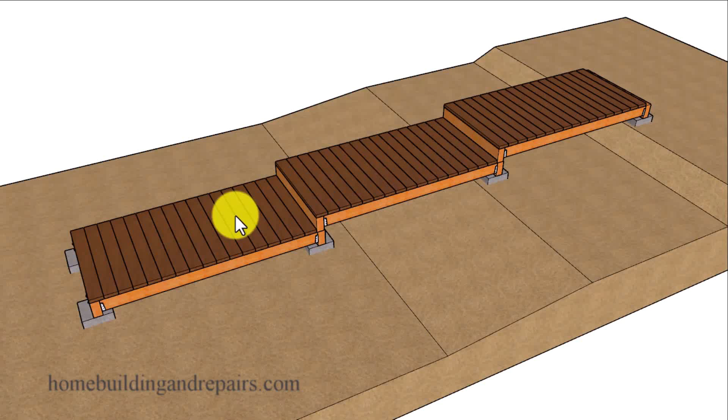Here is a video that will be helpful for anyone who is going to build a long stairway, something that might have 5-foot or even 8-foot long steps to go up a low sloping hill. And that will be to simply build the stairway in sections like you would a floor. So there's no need to cut any stair stringers here. And this video is meant to just provide you with the basics.

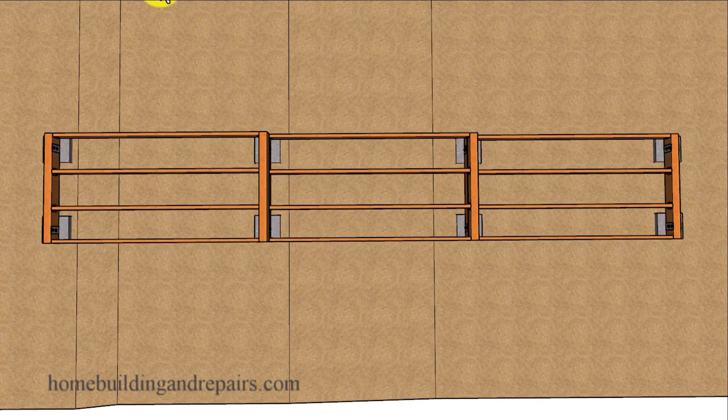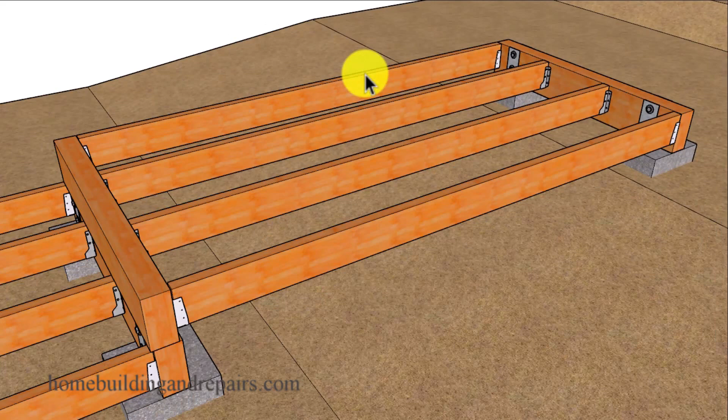So again, we're just simply building floors, and we're setting the supporting beams on top of other beams or concrete footings to transfer the loads down to the soil. So again, concrete footings with some metal hardware so that we can secure it firmly to the footing. And trust me, I've seen plenty of these built where they're basically sitting on top of the soil, some concrete blocks, or even a small footing, and that might not cut it.

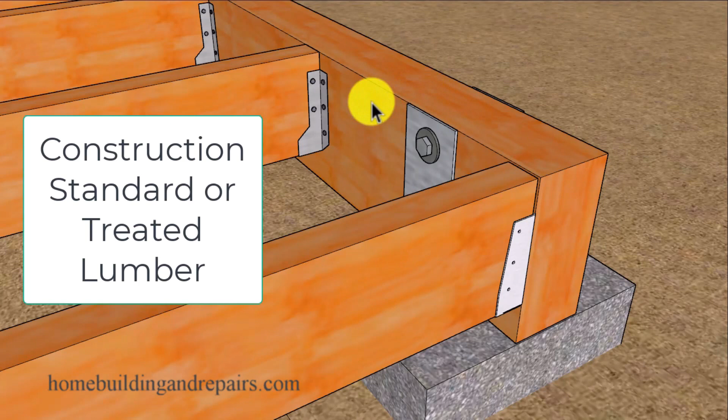So here you can see where we have some 2x6 joists, 4x8 beams, and we have some 2x6 hangers here, regular hangers, and then we have some inverted or concealed hangers. And you can always move this joist over if you want to use these hangers, and then let the decking cantilever 1.5 or 2 inches, and that shouldn't be a problem, but that would depend upon the design.

And of course we have a 16-inch on center layout. Our stairs are 48 inches wide, and each step is about 8 foot in length. And you might be able to get away without using a beam here if you were going to have the joist sit on top of maybe a 2-inch framing base plate, something to support the joist.

And then of course you could use a 2x8 here, and you could simply nail these beams together. You could nail the framing components from the upper floor into the lower floor, or you could even use some type of hardware, screws, something like that.

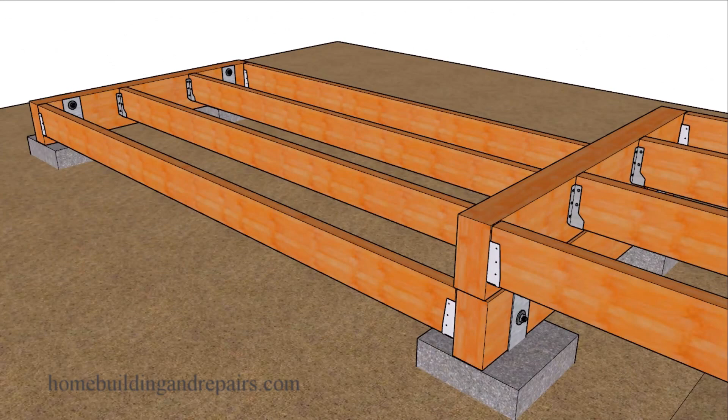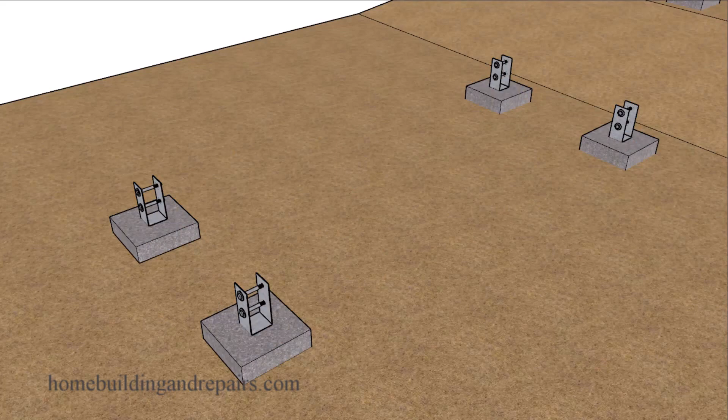So not too difficult here, or at least I would hope it's not too difficult to take a look at something like this and kind of figure out how you could put it together in the same way that you would frame a deck. And a project like this could also be considered 3 separate decks that would simply be changing elevation. And of course you are going to need some form boards and some holes for your footings.

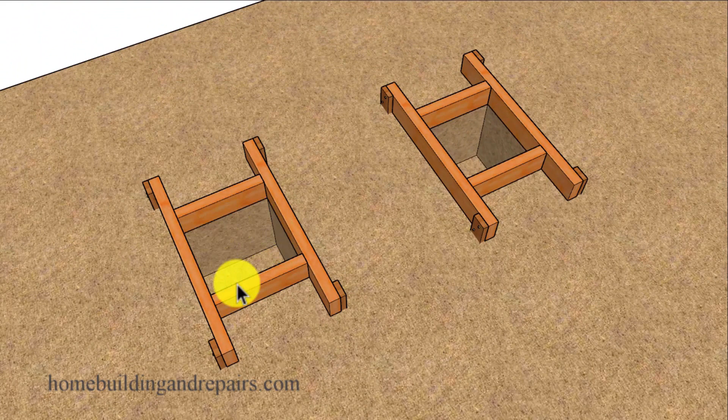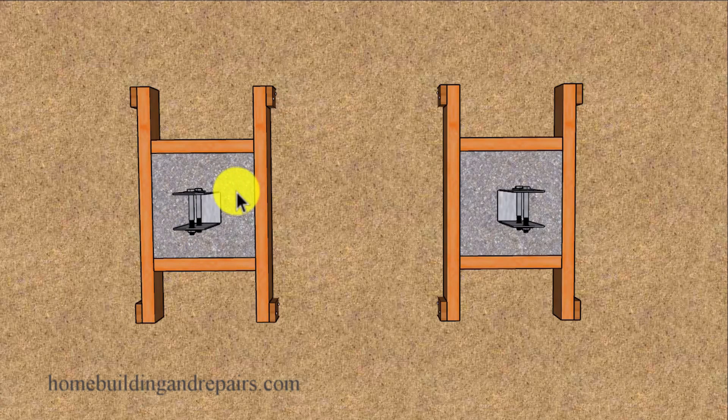After you've dug your holes and set your forms, you can place your building hardware and fill these up with concrete. Now keep in mind that if you live in an area with frost lines or frost levels, then these footings might need to extend past those frost lines.

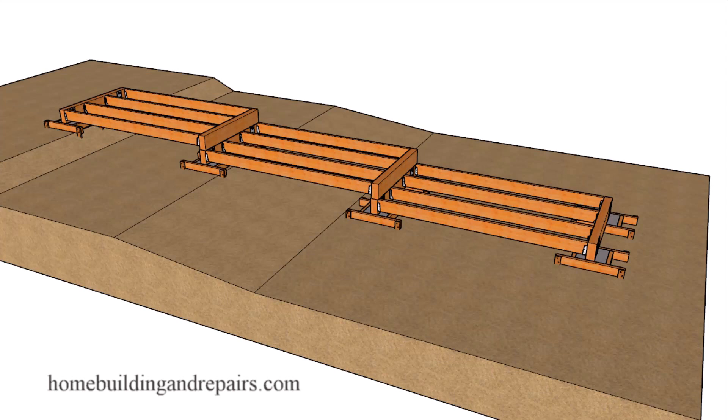So if you live in cold weather, do a little more research about frost lines in the ground, because the last thing you want to do is build something like this in the spring, only to find out that the next spring sections of your deck stairs have been raised to create a stairway that no longer looks as nice as it did when you originally built it. So hopefully that makes sense.